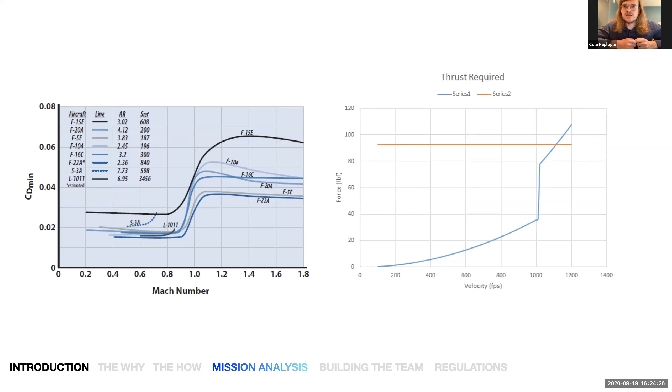So I kind of scoured the internet, made a long spreadsheet of every engine that I could find. And no, there's not a commercially available option that can get us through the sound barrier. But I found initially, if we got an 85% increase in thrust, we could potentially do it. Obviously, there's a lot of assumptions that go into that number. But with all that being said, I decided, and Colin decided as well, that it was kind of close enough for it to be worth our time, and it's going to be a really interesting project to give it an attempt at.

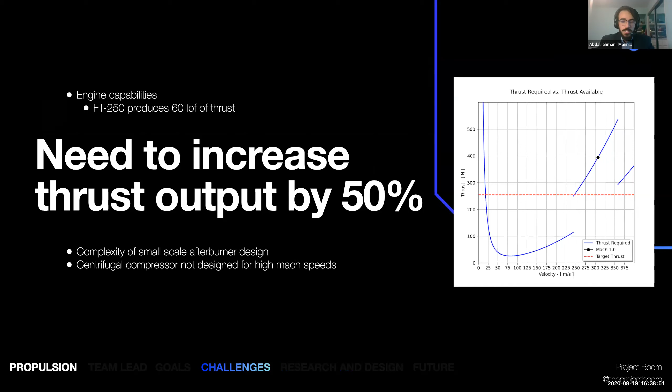Some other concerns we have found in designing the aircraft are the complexity of designing a small-scale augmentation system, such as an afterburner; fabricating some of these complex components may be difficult with our current abilities. Additionally, UAS engines usually use a centrifugal compressor, which isn't really designed for high Mach speeds. And if we don't address these challenges, we may literally become Project Boom.

Looking at some of our preliminary designs to answer these challenges, this summer we came up with designs for the aircraft inlet, exhaust nozzle, afterburner, and an integrated rocket augmentation system. For the inlet, we went with a pitot inlet S-duct with the goal of slowing down the flow for the compressor so that it can operate well. We also designed an optimized nozzle using an engine performance analysis, as well as simulation with computational fluid dynamics.

Another thing we've done is design a simplified afterburner, which is shown down there. We did this by performing a rudimentary engine performance analysis. We went with a relatively simple design, because scaling down a full-size afterburner is not possible, and there'd be too many complex components that we deem unnecessary. We'll be going with a system where we start simple, and if there are any needs or issues that need to be resolved, we will add those on as testing progresses.

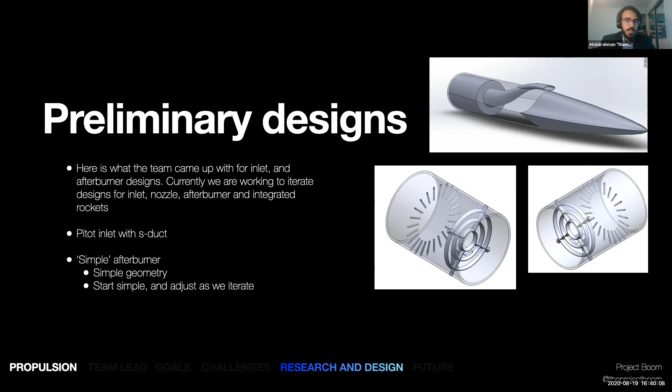Next slide. So our next steps. So with a detailed design of our afterburner coming soon, we'll be transitioning to more of a testing phase. As you can see to the right here, we have our humble testing stand with a KingTech K70 engine. We'll be using a K70 engine because, as Cole mentioned, we were able to acquire funds to purchase this engine, and this engine will serve as a proof of concept for our afterburner. This will show us if it's even possible for us to get a 50% increase in thrust for any engine.

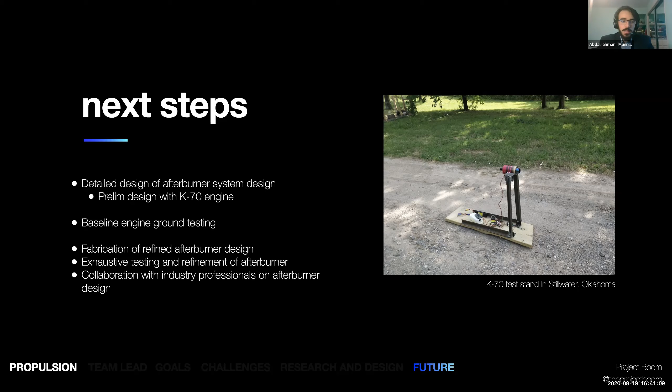We'll also be working with industry professionals to improve and define our afterburner design and to ensure that we have a reliable system that can accelerate our aircraft past Mach 1. We appreciate all of you for listening to the Propulsion Subteam, and Jonathan will take it away from here for aerodynamics.

Okay, so my name is Jonathan Burgess. I've had a little bit of connection difficulties, so we may have to deal with that. Apologies in advance. I just recently graduated from Oklahoma State University with Cole Replogle and Man Manzi with a Bachelor of Science degree in aerospace engineering, and also got one in mechanical while I was there. I'm actually at OSU right now, returning this week to get my master's degree at OSU, continuing what we started on our senior capstone project, working on turbo electric propulsion systems.

So for Project Boom, I'm the aerodynamics lead. I'm basically over sizing the aircraft and the overall shape of it and figuring out how that shape interacts with the airflow.

On a personal level, I enjoy hanging out with my kids, surfing, being outside and with family as much as I can. I've got a 6-year-old boy and a 2-year-old girl. Okay, next slide, please.

So as Man said, Man and Cole had come up with a pretty good idea of the thrust that we could expect from an afterburner turbine. And so we had that, and we've had the fuel burn that we could expect. So from that point, the aerodynamics team had to figure out what size aircraft we're going to have, and what it's going to look like. So we started to run some mission analysis. I developed a Python program to do a mission analysis on our aircraft, and a couple of constraints began to pop their head out pretty quickly.

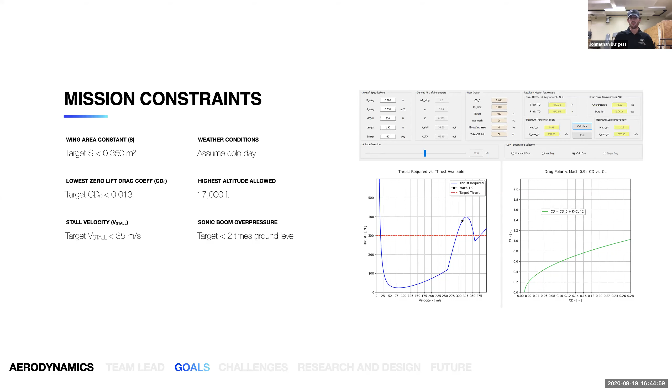As you can see, we have an insane maximum climb rate of 6,000 feet per minute, but I think we have like a 2-to-1 thrust to weight ratio, so it can kind of be expected. So that all checked out, everything looked good. And so from that point on, we kept moving forward.

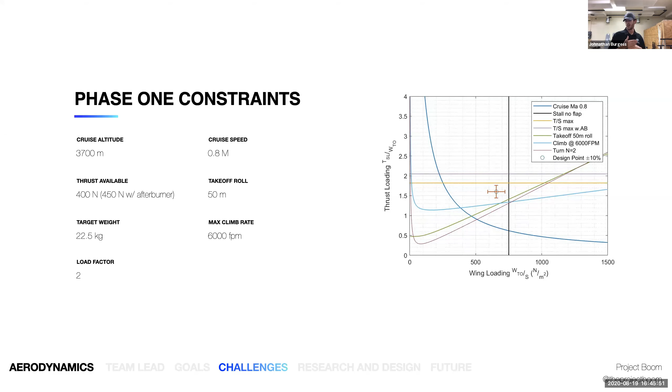And as Cole and Colin alluded to before, there was literally like an overnight change in this project, where we went from about 10 people solid to about 100. And so when that happened, next slide, please, we had to figure out basically what do we do with all these people and how do we go forward.

And so one of the first things we did as a project was come up with Aero Bid 1, the aerodynamics first bid. We took about 40 new members and split them up into 4 different groups, about 10 per group. And we gave them 4 different design concepts to come up with in about a week. There was a subsonic and 3 supersonic designs.

And up to this point, we only had the drawing in the bottom right of the screen there. That's the only thing we had, just preliminary sizing and literally a drawing on paper. And so after this week and a half that these 40 new members worked on 4 separate concepts, we immediately had 7 different concepts to choose from and all of their corresponding CAD files. So we went from a drawing to, 9 days later, having 7 different concepts to down select from, which was a really great problem.

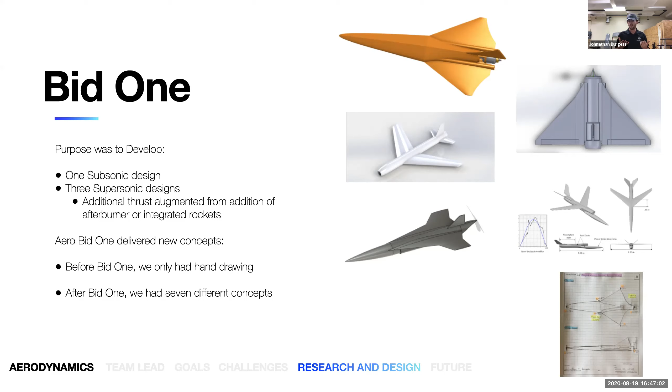And immediately we had like 2 or 3 things that we couldn't choose between right off the bat. So we took 2 of those and started to massage them around in the supersonic profile. And then we took some of the subsonic stuff and kept looking into that. As you can see the progression, it went from the hand-drawn drawing to the 4 bids that I just mentioned. And from there, we took the Bravo and the Charlie as our favorites for the supersonic design.

I'll get more into this in just a minute, but from there, we started to look at different turbine options, a 250 thrust turbine as well as a 400, and the resultant aircraft size and fuel capacity requirements. And right now, we've decided on the B250 as our first phase. So we've taken a lot of things that we've worked on in both of those. They're basically the same aircraft, just intended with different thrusts, different power plants.

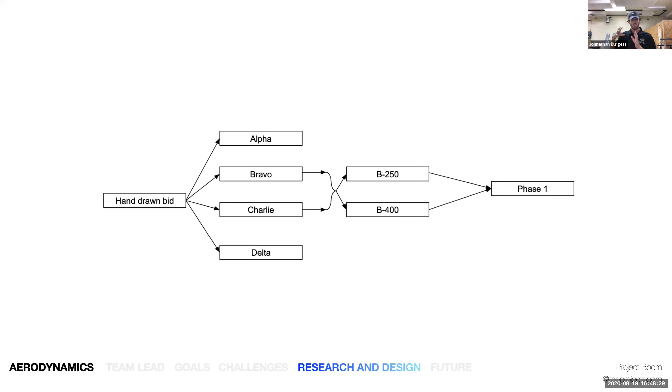And so here we are at phase 1. I know Cole and Colin have spoken to this already, but phase 1 is meant to be a subsonic proof of concept. We're going to prove our concept up to basically Mach 0.8, make sure it can fly and survive the transition period and the transonic stage and back down. And then for phase 2, we're going to take basically the same thing, and if we have to, scale it up, add rockets or an afterburner, and try to go supersonic.

Next slide, please. Once we had Bravo and Charlie, we needed to do a wing analysis separate from the fuselage. So for quite a while we looked at the wings by themselves and did some analysis. We figured out that we wanted a delta wing because of the low drag, the ease of manufacturing and its structural rigidity. We knew we needed a small wing, but it still needed to be strong enough to not break. If we had a really long or rear swept wing, it potentially could have structural issues. We're not going to use the wing for much fuel capacity anyway because of how thin it is.

There are multiple different delta wing configurations out there. We started to compare them all and came up with a cranked wing and an arrowhead wing, which are on the right. The cranked is on top and the arrowhead is on the bottom. The reason why is they provided the lowest drag of the deltas. We chose the cranked because it was the most forgiving at different angles of attack; the aerodynamic center shifted less. So we've decided to go with the cranked wing, even though it's slightly draggier than the arrowhead wing based on our analysis.

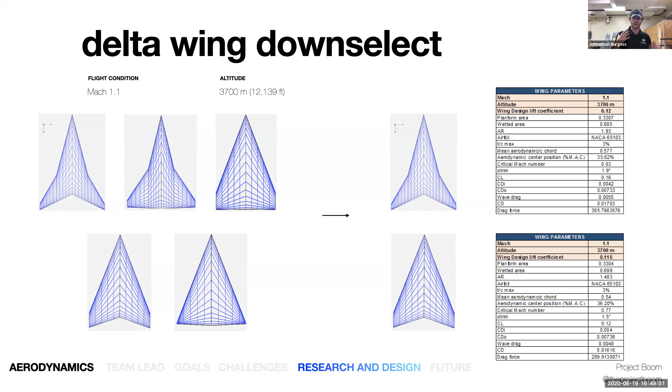Next slide, please. And so once we had the wing and we had a fuselage that we chose, we started to integrate them together. And if you do or don't know, one of the things that you need to adhere to or at least take note of if you're trying to go through the sound barrier is what they call the area rule and your adherence to the Sears-Haack curve as an example.

And so this is kind of some of the progression that we've had in the aero department for following the area rule. And as you can see on the top right, that's kind of where we started. And then at the bottom, this is kind of like our iterative process to get to where we are now or to where we would want to be.

And so for this, you may not know what it is or how it got there or what the area rule is. So basically what it does is it analyzes the cross-sectional area from the nose to the tail or vice versa of the aircraft. And it's supposed to follow that curve. And so the dotted line is the one we want and the blue is our actual.

And so a couple of our members figured out a way all on their own and completely unprompted how to create a macro that works with SolidWorks and MATLAB to plot this. So they've been using it a lot. Great job, you guys. It's just an example of something that's come from this. That's not exactly what we were expecting, but it's a great tool.

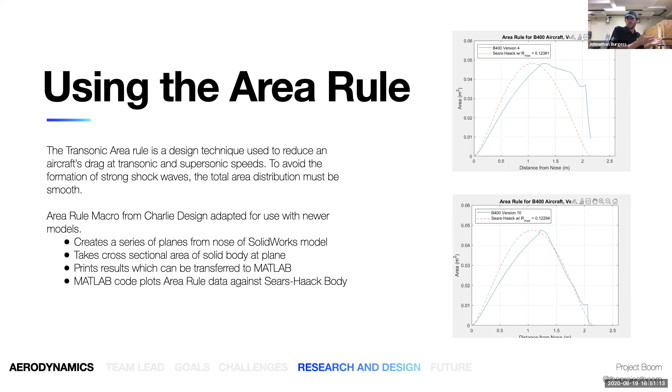So next slide. One of the things too that we've been looking at on the aerodynamic side and kind of pairing with the propulsions team is the inlet design, because there's a lot of different ways we could go with this. One of our competitors potentially out of Florida, they were going to leave their turbines completely exposed to the free stream, and that's probably one of the reasons why they didn't succeed.

Because when you go through the sound barrier, you're going to have to deal with shock waves. And so if you design the inlet incorrectly or not at all, then you can potentially damage your turbine, stall it, things like that. Bad things can happen. And also, if you design it correctly, we could actually increase our performance at our design point. And so this is an inlet that we've been working on. It's kind of modeled after the Tomahawk inlet.

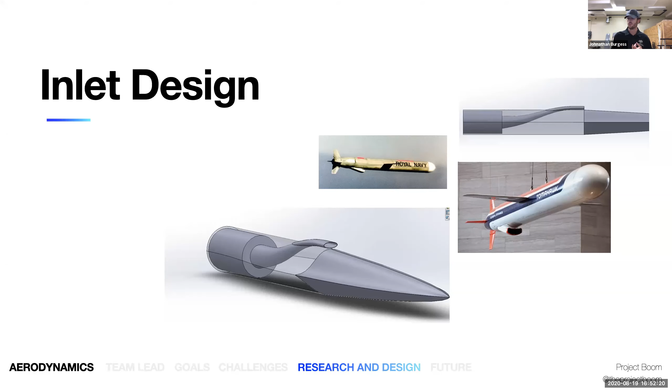And so this is basically the Bravo design. The top left is the initial CAD drawing that was drawn from the hand drawing that we had. And then from the top left to right and then down, that's kind of the progression. And so you can see where there was a major change on the bottom, and that's where we went with Bravo, but we decided to blend Bravo and Charlie together, which was from our first bid.

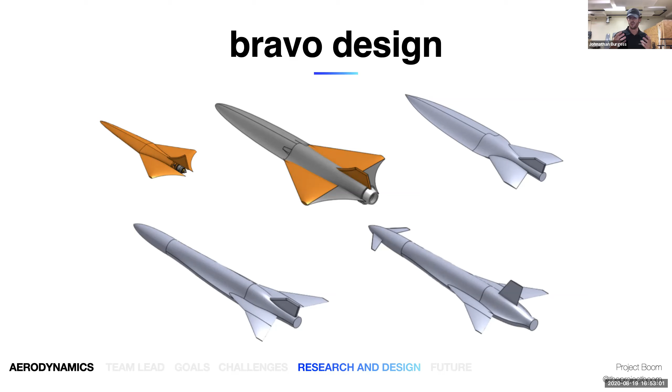And so what's next for the Aero team basically is right now, tomorrow and tonight, we are starting a foam model build. And so we're going to try to take a full scale 1-to-1 foam model and try to fly it to prove out that our V-stall is where it should be, and prove out where our CG placement is, the stability control of the aircraft and things like that, and the maneuverability.

And then also we plan on having our avionics guy come in from Berkeley and try to fly this foam model with an autonomous flight controller. And so we can hopefully prove all that out within the next month or so before we ever actually try to go into some real manufacturing or anything.

So talking a little bit about StabCon is trying to prove that out and everything. And so we're going to do that through the foam model. And speaking of that, I think next we have the StabCon lead, Skyler, who's going to talk about how we're actually going to control this thing.

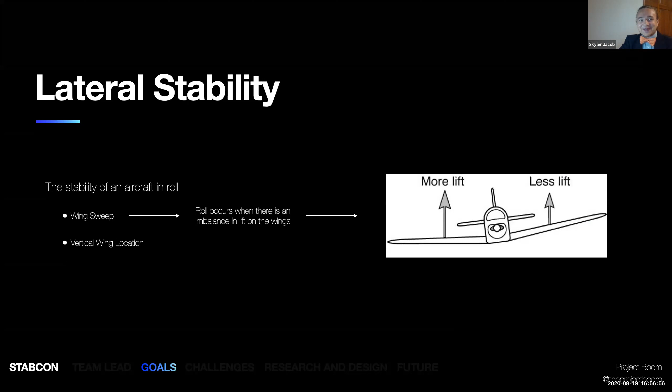And the last of our stability sections is directional stability. This is what will keep our aircraft moving straight. This is crucial since an angle of side slip will increase the perceived frontal area of our aircraft. This is achieved by using vertical stabilizers to increase the amount of area on the rear of our aircraft. It's exactly how a weather vane works, using what is called a weathercocking effect. From there, we'll actually go into our controls.

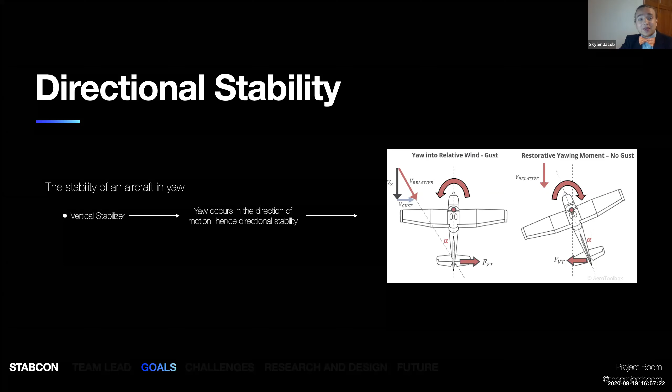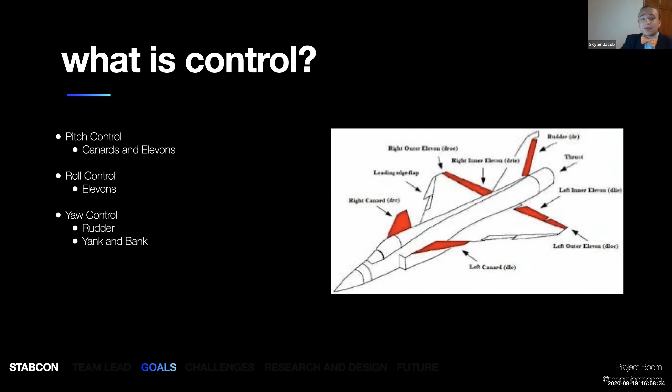The roll control will be achieved by moving the elevons in opposing directions, while yaw control will either use the rudder, the red highlighted surface on the rear of the aircraft, or a yank and bank maneuver that is a mixture of pitch and roll to change the direction the aircraft faces.

Next slide, please. Those surfaces have been chosen to counteract some of the major problems we'll be having our aircraft see at high subsonic and transonic speeds. At these subsonic speeds, the aircraft is going to have a high stall speed, which is generally unwanted because the stall speed is the speed at which you lose lift over your wings and your lift does not equal the weight of your aircraft. These higher stall speeds are due to our small wing sizes.

This in turn will decrease our control authority at our low speeds. This mixes in with the need to keep our static margin positive between 5 to 15% so that we're stable and controllable, as mentioned earlier.

In the transonic region, the aircraft will encounter Mach tuck, which will cause the aircraft to pitch down drastically due to the velocity and pressure differentials over the wing's upper and lower surfaces. This region will also cause forced flutter, which is an aeroelastic effect caused by the turbulent flow over the control surfaces. This can create unexpected forces that will prevent the surfaces from being controlled or even break them from the wing.

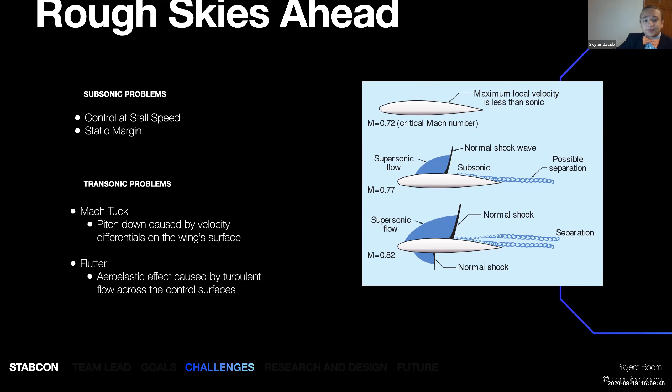Next slide, please. This leads us to our chosen preliminary StabCon configuration. Our aircraft will have elevon surfaces on the inboard of the wing and a control canard at the front of the aircraft. This is pretty similar to the XB-70 Valkyrie, which is a sick plane just to begin with. If you don't know it, please look it up. The canard doesn't add much additional lift on the front, so it doesn't move our aerodynamic center or our center of lift forward much, as it acts as an all-moving stab. That way, it'll change the angle of attack of the aircraft during the transonic region. This will allow us to counteract both Mach tuck and flutter.

The final surface is the vertical stabilizer, which will help keep our aircraft facing forward during flight. The direction of flight will either be changed using a rudder or a yank and bank maneuver as talked about on the previous slide. Next slide, please.

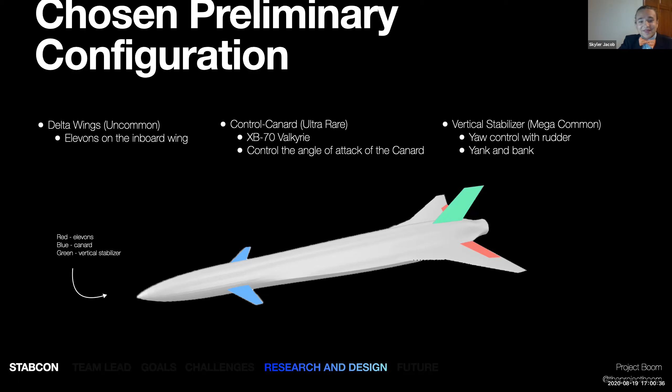This leads us to where we need to go as we move on. The largest of these is knowing exactly where our static margin is, because a change of 1 to 2 centimeters of the center of gravity of your aircraft can drastically change how your aircraft moves around in the sky. This will be achieved by narrowing down the precise location of that center of gravity and using our VSP model and calculators that the amazing members of the StabCon team have developed to actually nail down our stabilizer sizes and our control surface sizes. That way we get a good center of lift for our aircraft.

From there, we will choose an airfoil that has a low drag and a low lift for our canard. Then we will design how the control surfaces will be actuated by picking servos and motors to maneuver those surfaces and place them within the aircraft.

After all that is done, we will have to use our stability derivatives, which is this huge, ugly matrix of numbers, and find those constants for our 5 modes of flight. That way we can give the inertial matrix and aerodynamic characteristics to find our natural frequencies for our aircraft that avionics will have to use later down the line, so they can actually control how our aircraft reacts to some of these air forces.

Now that this roll has come to a stable stop, why don't we turn it over to structures where they can pitch us their plans? Thank you. On to you, Gaurav. All right, thank you so much, Skyler.

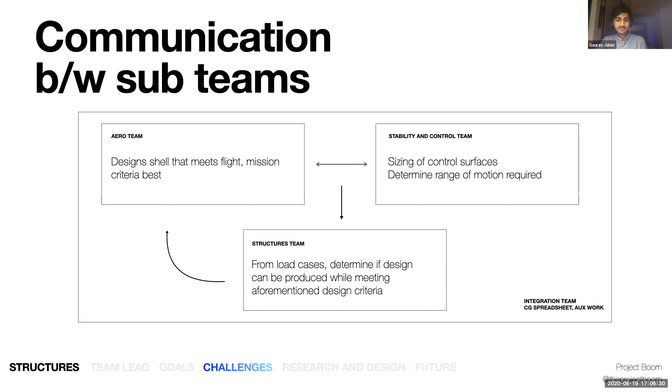And then these design constraints are fed into the structures team, where we determine the feasibility of the design and update the aforementioned teams if any changes need to be made. For example, having thicker wings to be able to withstand our expected wing loads. And we continue to iterate from there. Next slide, please. Next slide, please. Sorry, I think we're having some technical issues.

Okay, there we go. So due to aero design still being in a bit of a conceptual stage and having more concrete designs literally as of 2 days before, the structures team has mostly been focusing on developing tools to aid with rough sizing of components, to be able to move quickly once aero dimensions are more concrete and load cases are established. This has been the focus of bids 1 to 2, as can be seen in the diagram.

So the basic idea behind developing the wing analysis tool, as mentioned in the bubble of bids 1 and 2, is to be able to produce a more educated FEA model. FEA is by far the sharpest tool at our disposal, but it takes time and experience to set up correctly. So making frequent changes to those models is time consuming and inefficient. That kind of explains our reason for developing these tools.

With the latest bid 3, which is mentioned on the right-hand side, we also started to look into materials available, manufacturing techniques, etc. The team set up decision matrices to evaluate various options and identified rough constraints, providing us with a good tool to make our choices in the future.

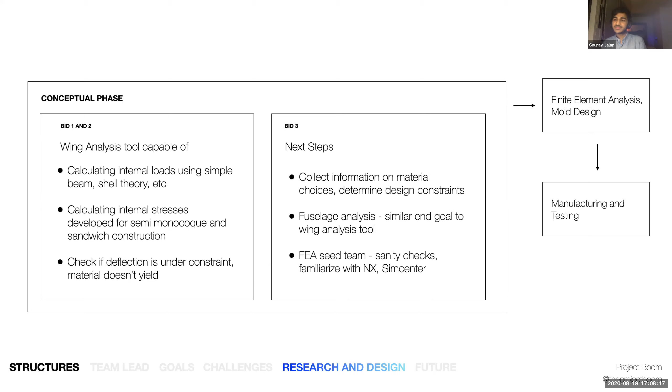We have also set up a small team to start working with Siemens NX, which we have selected to be our analysis tool of choice, because it combines CAD, FEA, and composite analysis under one piece of software. It also makes it easier to have the same software across all of the members and not have to deal with issues of models being compatible and things like that. So next slide, please.

Over here, we have some examples of the work done by a lovely team. Starting from the left, we see a VN diagram made for a previous iteration of Bravo. We took some industry standard margins of safety and ultimate loads into account.

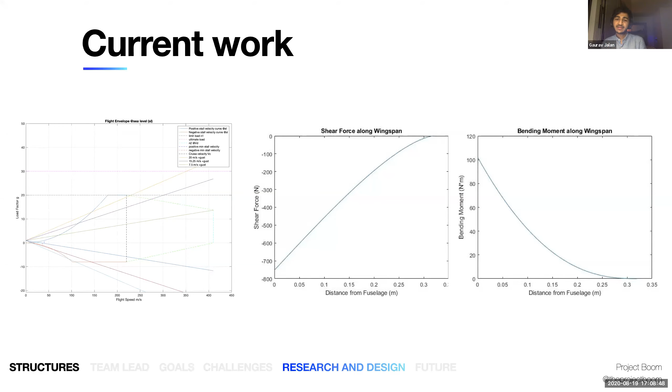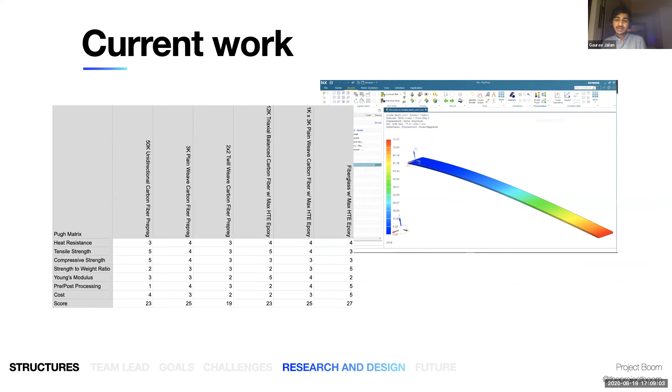Then the other two are a span-wise shear and bending moment produced in the wing, which are from our MATLAB tool. Next slide, please. On the left-hand side, we also see a decision matrix evaluating our various material choices. And then on the right-hand side, we have some sanity check FEA, which has been done by our bid 3 team. Next slide, please.

So finally, some important technical challenges that are ahead of us. As Skyler briefly touched upon, the unpredictability of loads and vibrations in the transonic region make for some tricky analysis. FE models, more so with the involvement of composites and multiple interacting surfaces, are tricky to set up, for which reason we have a small team, as discussed earlier, working on reproducing results from existing papers to get a feel for these analyses. Harsh landing options, such as having a net capture, which is essentially a high impulse loading case, would be tricky to analyze.

Next, design of possible retracting control surfaces would be an interesting design challenge due to a high reliability requirement and the scenario of it being used at high speeds. A big manufacturing challenge would be mold design, so getting pieces to line up precisely, the molds themselves, which are very time and resource intensive to produce, and finally designing tests that give us a good idea of what the performance of the structure is going to be like in real flight.

So that brings us to the end of the work being done by the structures team, and I shall hand it to our avionics lead. Thank you. Thanks, Gaurav. Next slide, please.

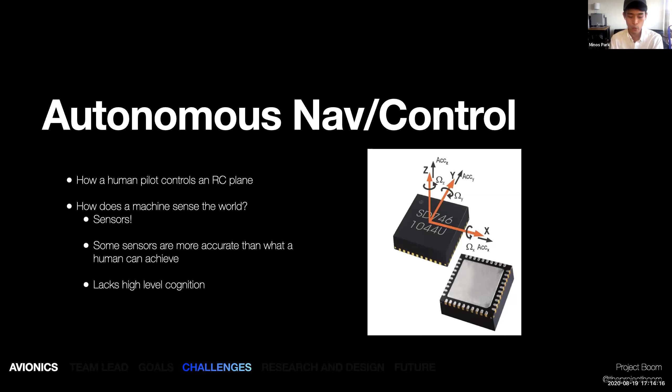It uses sensors. For example, an IMU sensor pictured here measures acceleration and angular velocity in each of the 3 axes. Sensors can measure things to an accuracy a human cannot possibly achieve, or things humans outright cannot sense. However, a machine using sensors lacks the high-level cognition that humans can perform nominally on a day-to-day basis. Yet, going from point A to point B is a simple task for a human. Next slide, please.

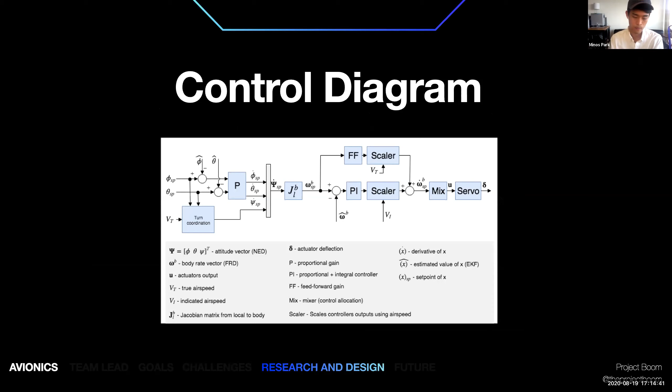The primary IMU for the phase 1 mission is ADIS 16470 from Analog Devices, which has an excellent data output rate, in-run bias stability, and noise density. For GPS, we have selected a real-time kinematic GPS unit that gives us centimeter accuracy with a ground-based station for RTCM corrections. Next slide, please.

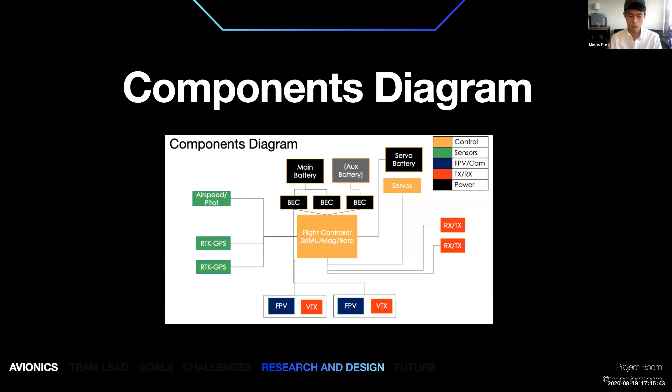Now, system simulation is useful for a variety of reasons, and for our SLS, it is particularly useful for testing all functional and performance characteristics at the components and subsystem level. For example, we can test the performance of the autonomous controller with the simulated sensor data. A PI at a lab that I work in said a simulation is always bound to succeed. This is true for our SLS as well. And to make the simulation useful, we need to be aware of its limits and know how to improve the physics and simulation fidelity to the degree that we can accept the simulation results.

For SLS, we are using JSBSim, an open source flight dynamics model library that is highly extensible for modeling the vehicle, and FlightGear, a flight simulator, and have the flight controller run in a software in the loop simulation that interfaces with the simulated world and have it actuate the controls. We will continue to improve the simulation by emulating the physics during the transonic regime, as well as use the flight data from the test flights to measure the performance. Next slide, please.

So far, we've shared the avionics team's progress, from reasons for our choice in the autonomous navigation and control, challenges in component specification, and a scheme to measure the performance at the components and subsystem level. Our next steps are to increase the simulation physics fidelity for the transonic regime, collect data and validate the SLS with real test flights, start the process for acquiring components, iterate through our design process with SLS results, and use SLS hardware in the loop simulation for pilot training.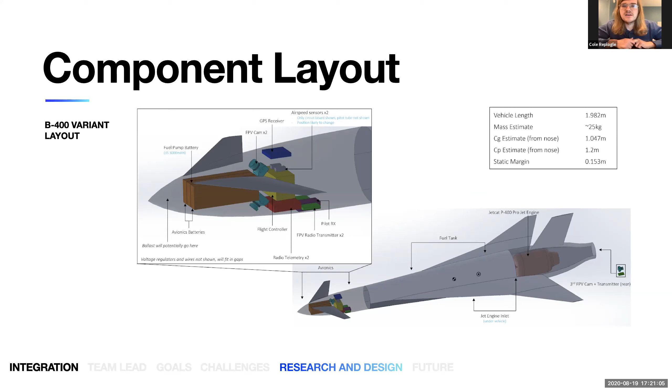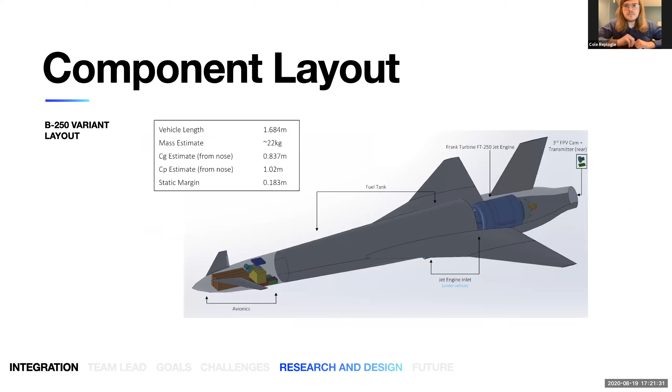Takeoff and landing is an active area of research for us. I think we're converging towards solutions there. So basically, again, it's all a volume and weight sort of game, where if we can externalize our takeoff and landing to the ground, to where we don't need to carry a parachute, a landing gear, anything like that, then that's preferable. There's a lot of different takeoff options, and we'll likely have way more runway than needed. So takeoff isn't really as big of a concern as landing. We've talked quite a bit about how high our stall velocity is, around 35 meters a second. I wouldn't want to be standing near that personally. So getting that to land with such a high stall velocity has been challenging.